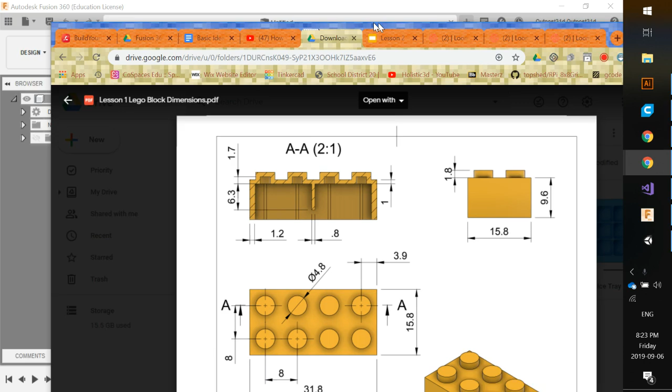First up, we're going to click on our icon up top and make sure we click on New Design, so we have this nice blank space. We also want to make sure we have a reference image up in the corner, so I'm grabbing my other window on my monitor. I'm scrolling down and there is my reference image that I'm going to be using - is that a Lego brick, Katya? Yes, definitely.

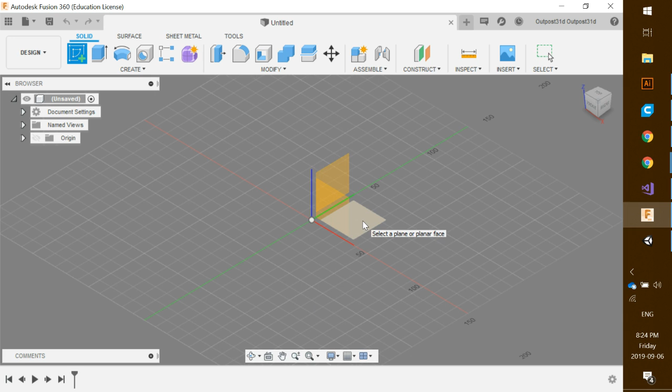Okay, so what we're going to do now is create our sketch. There's a little sketch icon right here, so I'm going to click on that and choose a plane - we're going to be choosing the X and Y plane. I'm going to click on that plane, and you can see if I hover over, they change colors. That will put me in this sketch palette.

In the sketch palette, you can click on the plus sign and see some different options here - we're not going to be using those yet. What I am going to use is across the top, the 2-point rectangle tool. If I click that once, under feature options I have 3 different types of rectangles I can use. We're not going to use the 2-point, we're going to use a center rectangle.

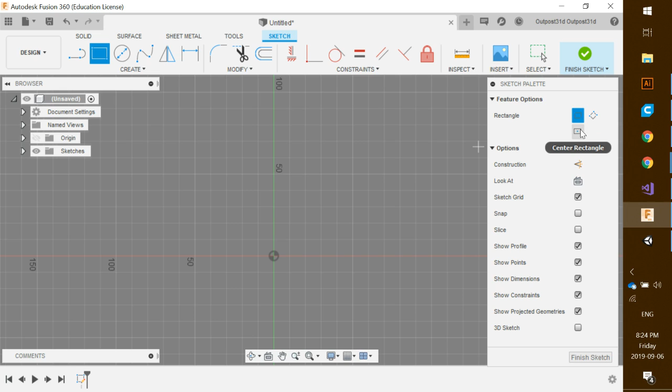So click that once, and I'm going to hover over the center point here, and it will go blue. Click once and drag out. Now I want to dimension my sketch - the length is going to be 31.8, then I hit Tab on my keyboard, and the width is going to be 15.8, and I hit Tab again.

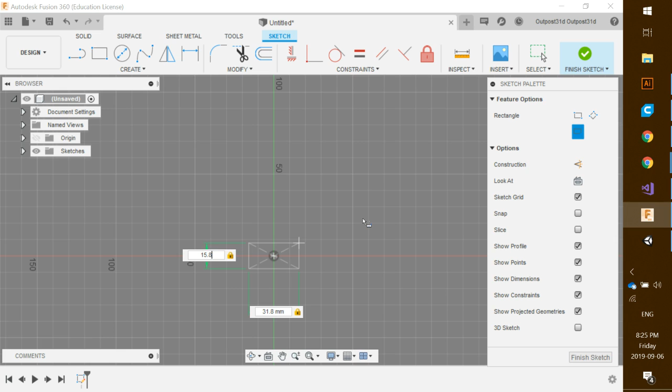So what I can do now is click on Finish Sketch, and it will take me to this view. I'm going to go up to the home icon and click on that - it'll take me a little bit closer, and I'm just going to use my mouse scroll wheel to zoom out a little bit. What do you think, Katya? That looks okay so far?

Yeah. Okay. My dad messed up on the other one too - you have to make another one. Yeah, you got to do this stuff a lot, eh?

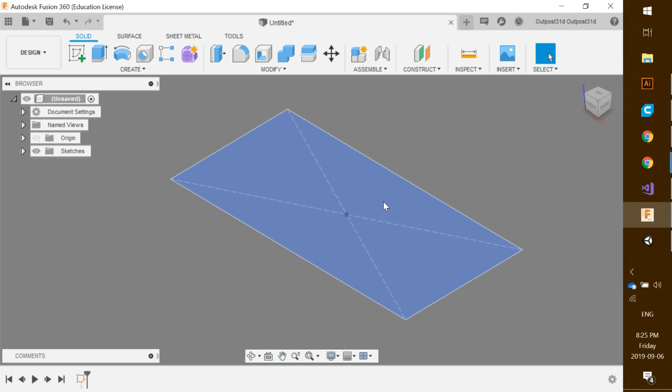Okay, so what we're going to do now is make this 3D. I'm going to hover over this sketch here, and it goes that blue color. I'm going to click once, and I'll hit E on my keyboard, and you can see this little arrow appears, and I can drag this up and down to extrude the object. Extrude is also highlighted here, so you can do that as well. Here is the little tab, and you can put that wherever you want.

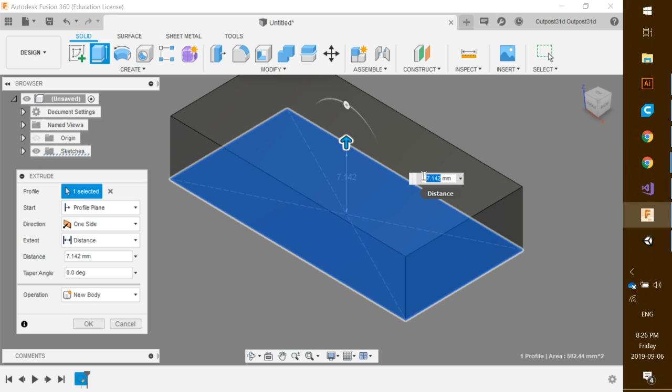Now, the height of my Lego brick, looking at my reference image, is 9.6. So if I just type in 9.6 and hit enter, you can see I've got my Lego brick all ready to go. Okay, so what we're going to do now is we need to actually make another sketch on top of the Lego brick here to do our circles.

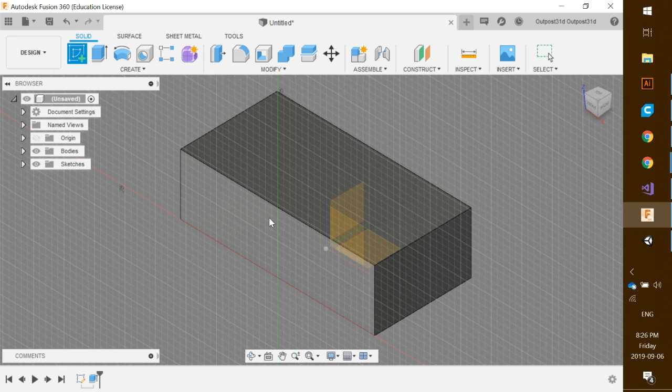So we're going to click on Create Sketch. We're going to hover - you can see it will go on the different sides of your object. I'm going to hover over the top and click once, and it will put me in a nice top view there. Sketch palette's ready to go, and I'm just going to minimize the sketch palette, and I'm going to click on the center diameter circle.

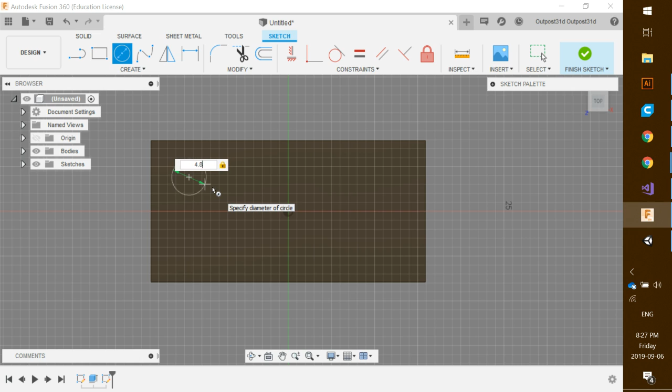Now you can see there's different types of circles under the feature options. We are going to stick with this one, the center diameter circle, and we're just going to hover - we can really hover over anywhere here - and click once, drag out, and I'm going to change my dimension to 4.8 millimeters, so 4.8. Okay, and I'm just going to hit enter, and my circle is ready to go.

Now, I could move this circle around, but we want to get it exact. So what we're going to do is hit D on our keyboard, and D is for dimension - you can see there's the dimension icon right there, so I can click that, or hit D. What I want to dimension is from the center - how far the center of the circle is from the edge. So I'm going to click on the center of the circle, and I'm going to click on the edge here, and you can see this dimension appears.

Actually, I have done that incorrectly, so let's try that again. I'm going to hit dimension, and I'm going to click on the center of the circle. There we go, that's what I wanted. And there is our dimension.

So we can click that again. Looking at my reference here, the dimension is 3.9. Hit enter, and it will move the circle out that way, 3.9.

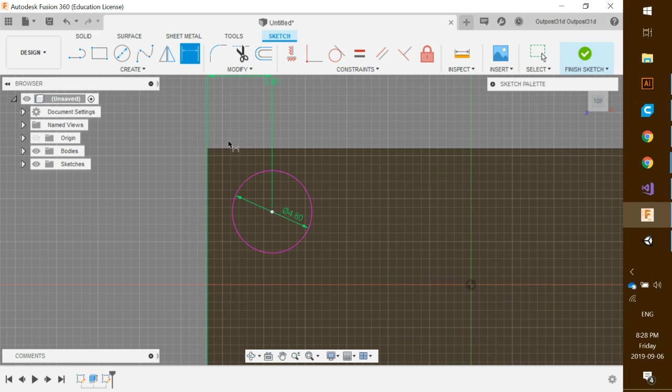We also want to dimension our circle this way as well. So I'm going to click on the center of the circle, click this part, and drag out this way. Same thing, I'm going to type in 3.9. Okay, does that look like it's in the right spot? Yeah, I think so, but you never know.

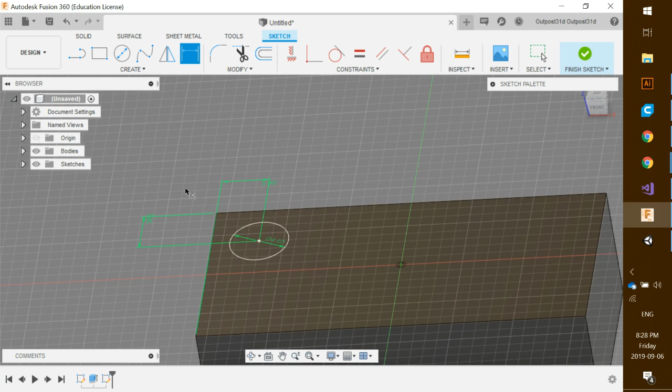We gotta keep trying here. So what we're going to do is rotate this sideways. Actually, you can go back and click on Finish Sketch. Now you can see I have some different places I can highlight, so I'm going to highlight the center of the circle and click on it. I'm going to hit E for extrude, and then pull this up.

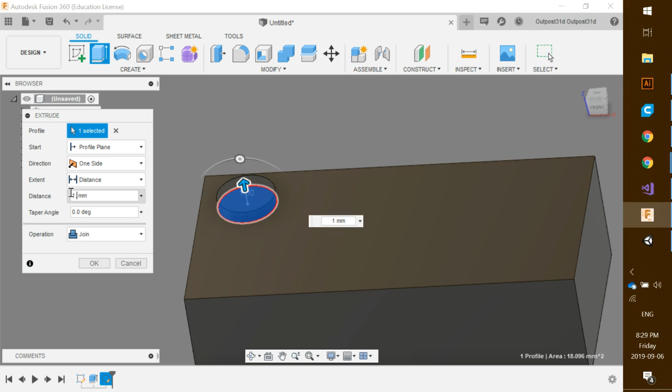Now you've got your extrude here. The distance, we can put here or here. I'm just going to put in 1.8 as the distance. Then you see the operation here, this is joining it to the other body, joining this piece on. So you want it at join, make sure it's joined, and click OK, and that will connect our first piece.

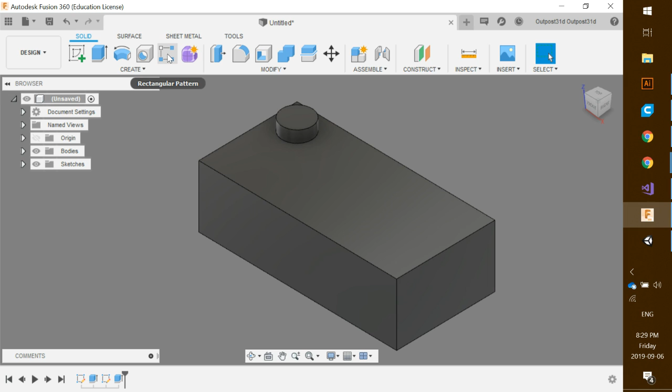I'm going to click the home icon so we get a better view. All right, so we basically need to create 4 of these this way and 4 of these this way. Now you could put them on individually, but there's a much better tool for this. If you look up on the top here, there's something called a rectangular pattern tool, also in the create drop-down menu. There are different types, so we click on rectangular pattern, and quite a few options pop up.

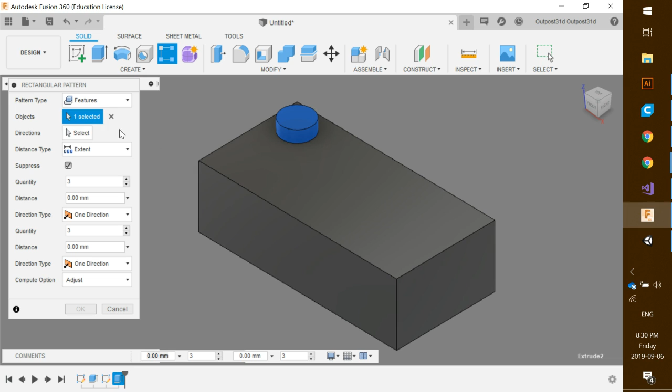First thing we want to make sure is we are under features, because if you look down on our timeline on the bottom here, we can choose features and the feature we want to replicate. I'm going to click on that feature because that is what I extruded right there. You can see the object it's selected is that. The direction I want to go this way because I want to put those this way, so I'm going to click on that.

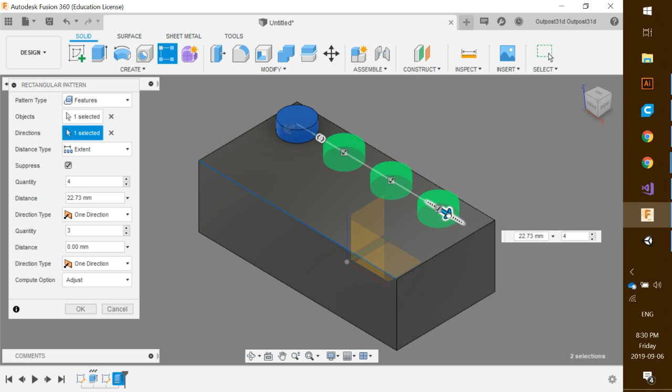You can see extent, suppress, leave that. Quantity, so 3. If I grab this arrow icon and pull out, you can see 3 of these appear. I don't want 3, I want 4, so I'm going to drag that out and pull again. Now you can kind of guess this, but I want them an even distance apart.

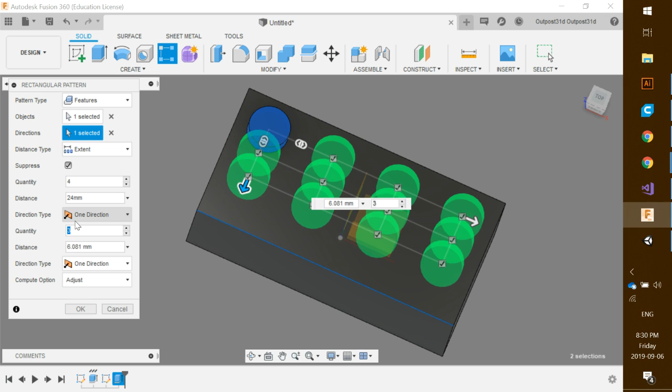From center to center, I want them to be 8 millimeters between each one, so I'm going to put in 24 for distance. There we go. Now dragging this way, I can pull them out this way as well. You can see that makes 3 there, but we don't want 3, that's no good, we're going to go 2. So that's got 2 right there, and the distance I want between here and here is going to be 8 millimeters. So there we go, and I just hit enter to finish that off.

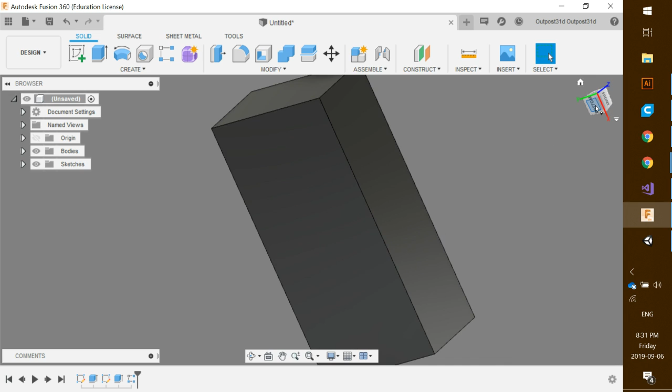And you can see everything is ready to go. We have our basic outline for our Lego piece here, which is pretty cool. Now I want to start working on the bottom of the Lego piece, so I'm going to click on bottom right here. I'm going to zoom out just a bit, and we want to shell this out.

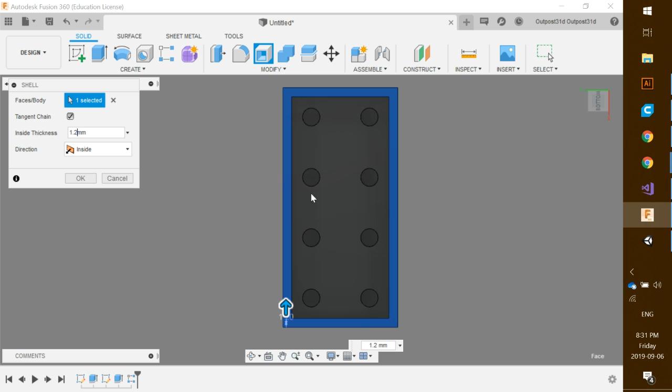So I'm going to click once on the bottom, turn it blue, and then go up to modify, where there's a shell command. I'm going to click shell, and it asks me what I want to shell, which is that part, of course. And I'm going to make the thickness of the inside shell — looking back at my reference image, it's going to be 1.2 right there. So that looks about right. If I drag this and pull around, you can see that's about the right size. So I'm going to click OK, and we've got the basic outline for our Lego piece.

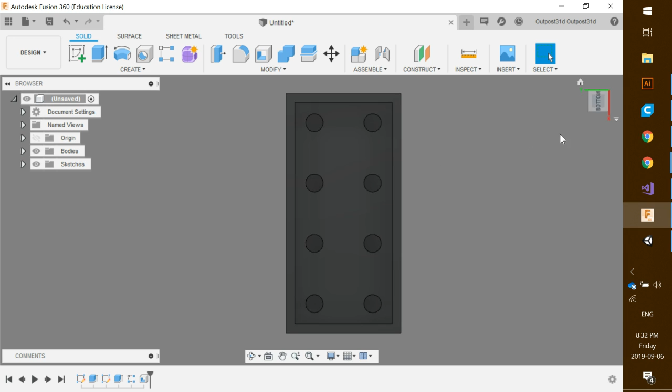Now, if you recall, a Lego piece also has circles or extruded cylinders in the bottom here. So what we're going to do is, let's see what's the best way to do this — maybe I'll just rotate it this way.

I'm going to click on sketch, and I'm going to choose this as the sketch plane. You can see I can choose the different sides, I'm going to choose this one. Click once, and that will put me — if you look sideways, you can see we are right inside the Lego piece now. So I'm going to zoom in just a little bit and use the line tool, which is that tool right there. I'm going to click that once, and you can see I can now kind of snap to these center pieces.

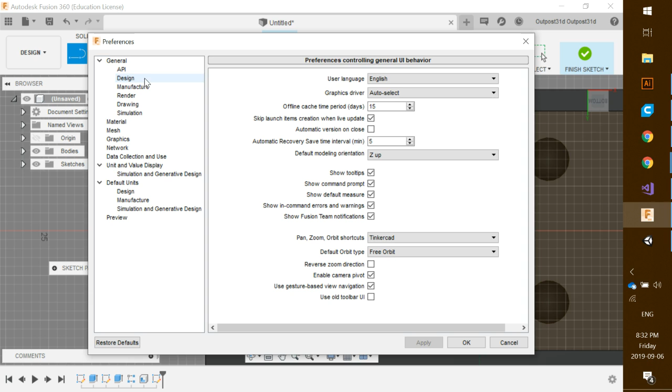Now, one important thing here to make this work is under wherever you're logged in up here, you want to click this, and click Preferences — I believe it's under General, under Design — and you have to have Auto Project Geometry on Active Sketch Plane checked. Make sure that's checked, and I'll explain why in just a second here. Now, here's our sketch palette.

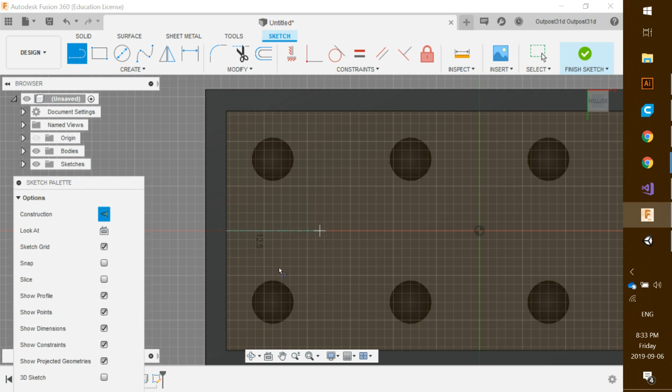Very handy. We're going to click the plus sign and create what's called a construction line. It's not a regular line, it's just dotted lines. I'm going to click on this center circle, drag up, and it's going to snap to that center circle. I'm going to click once, then click this little green check mark to finish that.

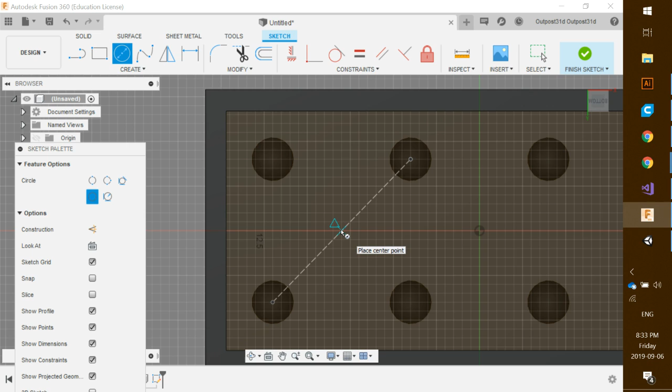Next, I'm going to click on the center diameter circle, and I don't want it to be a construction line anymore, I want a regular circle. So I'll click back on that construction icon, and pull up until I hit the center of this line. You can see that little triangle glyph tells me this is the center. I'm going to click once, drag out, and you can see it shows me when this circle is tangent with this circle.

So that little circle symbol with the line on it appears right there as it connects. Okay, so I'm going to click once.

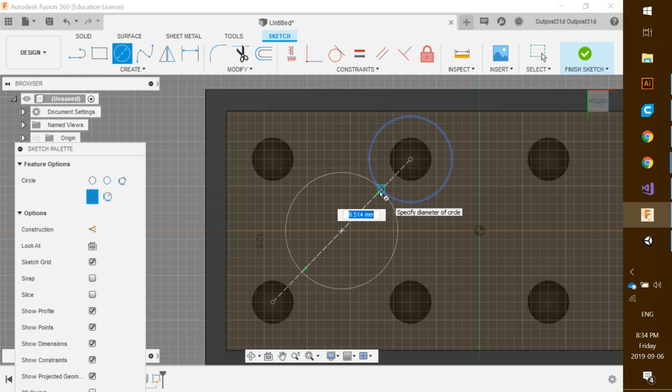Now what I want to do is offset this circle right here. So I'm going to click select up on the corner, and click this edge of this circle once so it turns blue - you see, just the outline is blue. And I'm going to hit O on my keyboard, O for offset, and you can see the little offset appear.

I'm going to minimize the sketch palette, and you can see this little offset tab comes out. The offset position, we can drag it around to offset as much as we want, but I'm going to delete what that is and click -1 as the offset. You can see that fits perfectly inside like that.

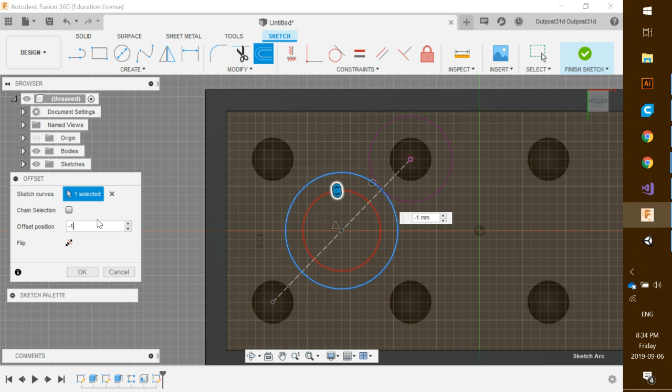Okay, so that's okay. Now what we want to do is extrude. I'm just going to rotate this a bit. We want to extrude this down, so we're going to make sure you highlight this area of the circle here, and click E on the keyboard.

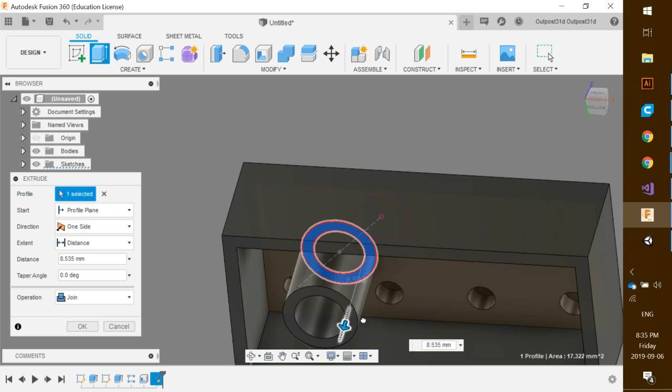I'm just going to back out a little bit so you can see what happens here, and I can pull this down, but there's an easier way. We're going to click on where it says extent, and click to object. It basically says, where do you want to pull the circle down to?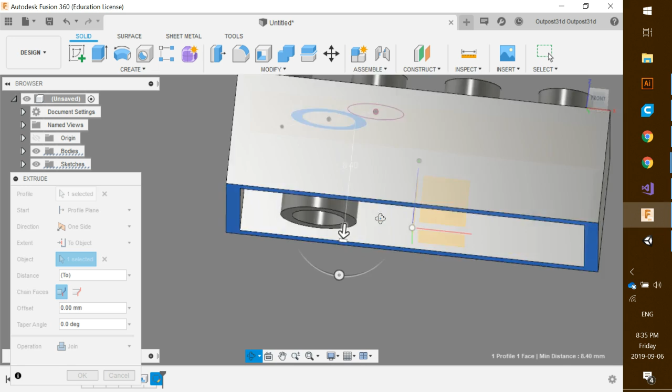And I'm going to pull it right down to the edge. You see that it goes light gray right there, that edge of our Lego piece. So I'm going to click that, and it extrudes it all the way down to the bottom of that Lego piece. See? And join, of course. We're going to click OK, and we've got our first piece.

Now, if you recall, we're going to go back to using our rectangular pattern tool to recreate this, basically. So I'm going to click that - here's our rectangular pattern tool. Pattern type is, of course, going to be features, and we click on the timeline, the feature that you just created. You can see it selects the feature that you just created.

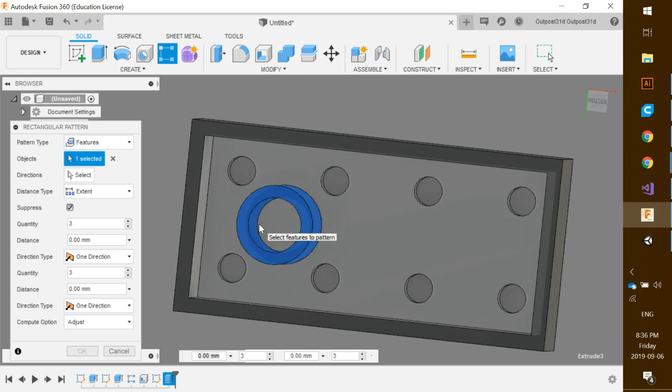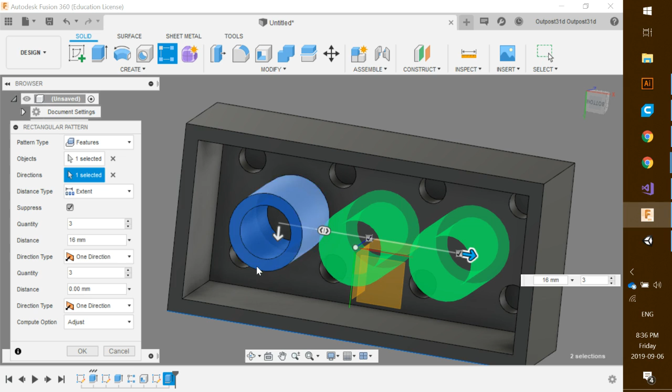So it selected one object, the direction. I click on select, and of course I want to go this way, so I'm going to click on the side here. As before, I can just drag it out like that, or a better way to do this is to do distance. So we are going to go 16 - 8 millimeters and 8 millimeters. So 16, and then this is all good. And then I click OK.

And so there we go, we have the bottom of our Lego piece. Now, one tiny more thing before we finish - let's fillet these edges here.

So what we can do is just highlight the edge, hold down Shift, and click all the edges of these cylinders like that, and click S on your keyboard - S is search - and we can hit F for fillet. You can see there's two different types of fillet; that is a sketch fillet.

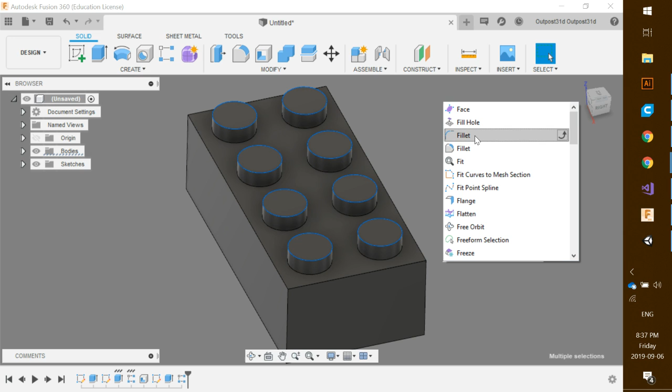We want this fillet right here, so we can click that, and you can just drag it in a little bit, and it's going to round them out. Sure, decimal, just put decimal 0.4 millimeters, and click OK. And there we go, we have our Lego piece all done and ready to go.

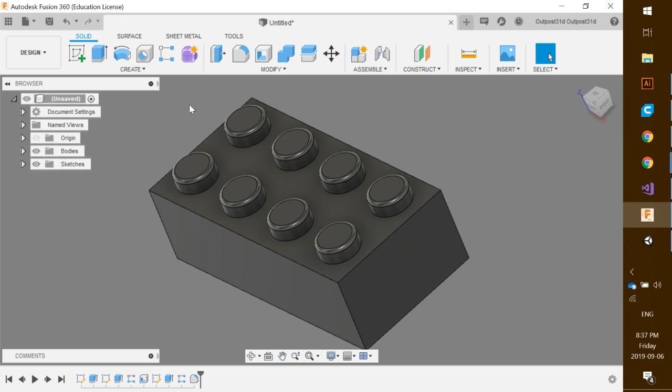Perfect. Hopefully this has been helpful. And don't forget to save your Lego piece.